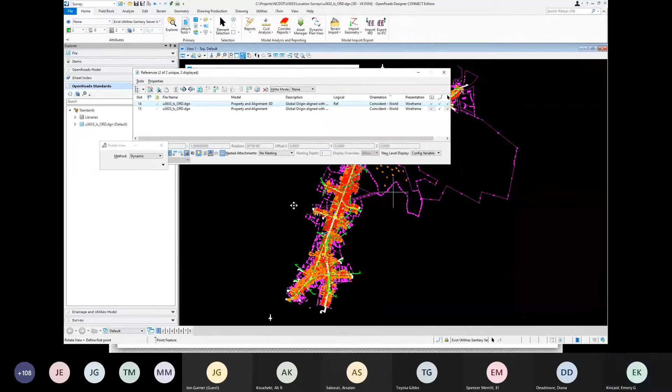Now, if you look here, what we've done is we've taken this file, and I'm going to just move my screen around here a little bit. You're going to see that this file is in 3D. It gets kind of ugly when I start moving it up here because everything here is at elevation, and everything here is at 0 because it's 2D.

So in effect, what we've really done is we've referenced the 2D to 3D. So I can come in here and I can simply toggle this off, and we see just the 3D aspects of the file.

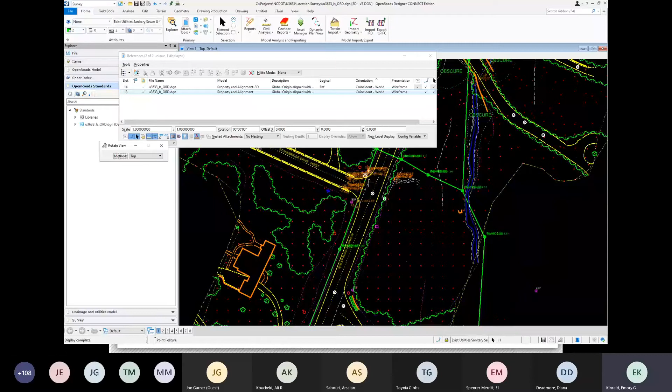If we zoom into some of these areas here, I want you to see some of the issues we're dealing with. We have the pipes, they're three-dimensional. And of course, I don't want you to think that means this is a model, because it's not. This is just 3D items in 3D space.

But especially in the areas of the catch basins, we are trying to do this automated, which gives you a little bit of faith that your labels are always going to get in, because it's easy to miss some labels when you're doing them by hand. But as you see, it gets real ugly here.

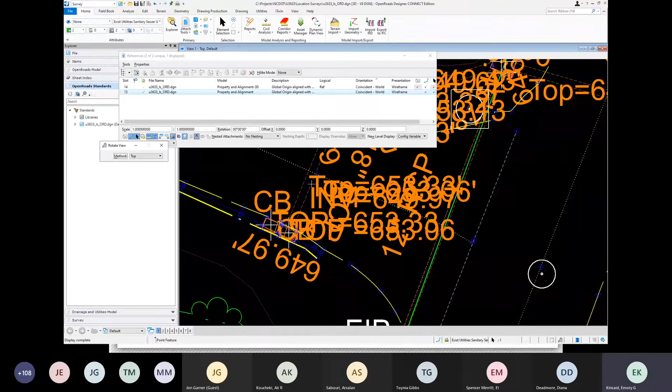Now, our hopes were that we were just going to move our text around and everything was going to be great for us. But we found that Bentley, through some of their automated mechanisms, is taking this text and putting it right back to where it began. And that's really causing us a little bit of grief. But that's the ugly we have right now.

Everything that you see that is being drawn here, I think these tools are going to work exceptionally well for you. We've tested them quite a bit. Some of our field offices have done quite a bit of testing on this. So I think you'll find that they work very well.

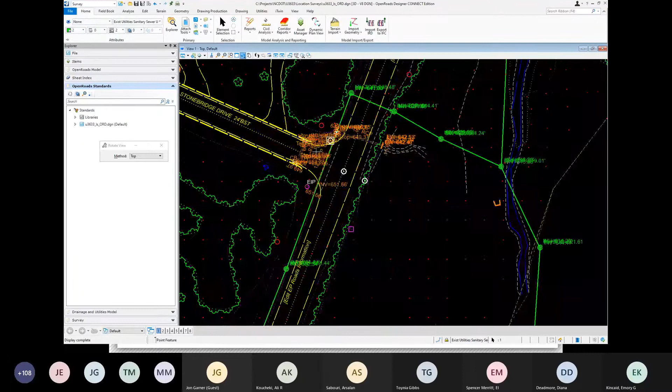So this looks like basically a merged FS file from the past, as well as a DTM file. Here you see the spots, you see the breaks. And of course, like I said, it's 3D. So if we turn this around, you're going to start seeing some of the aspects of it being in 3D.

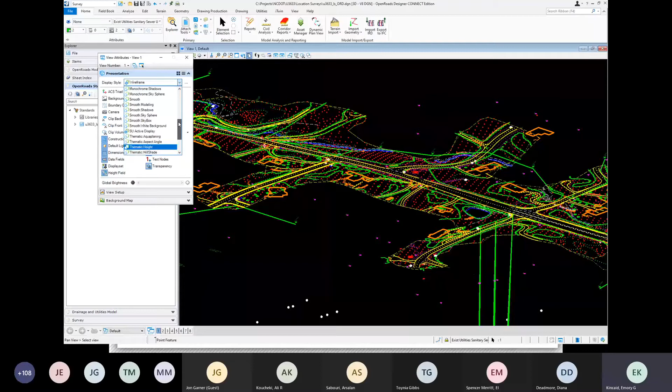What I'm going to do here is change the display style just a little bit. I'm going to change this from wireframe to the modeling, because that gives you a little bit better indication of what's going on.

Around the border of this, you're going to see a TIN hole, or a terrain model hole—trying to use the correct terminology. I can come in here and I can simply turn on our triangles, or whatever I want to, the contours. You start seeing what we're looking at.

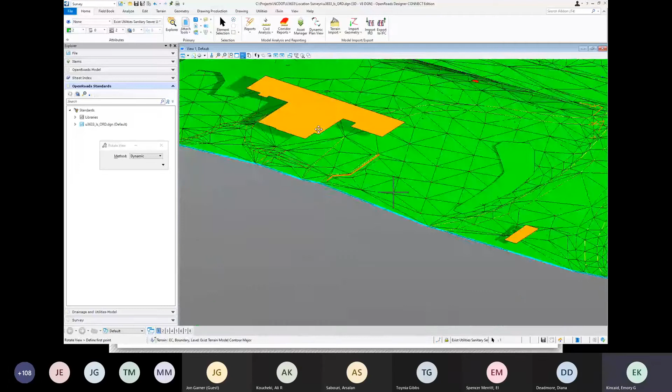If I go into the pipes or the piping areas, I need to change my translucency a little bit, but these pipes show up in 3D space correctly.

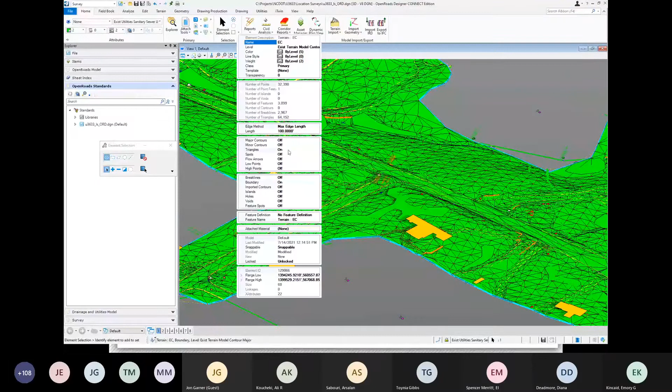And of course, as you see, they do show up as a circular object, as a pipe.

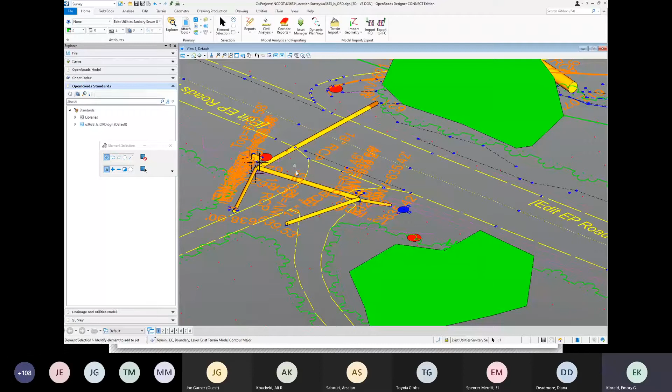One of the things we've been talking about is the labels and the issues we've been having with them. It is a bit frustrating. However, somewhere down the road, Hydro may come to us and say we really don't need those labels, because I can just as easily hover over those points and see what the elevation is without all that extra clutter. So we may find we don't need the labels, but for now, we felt everyone's used to it, so we need to produce those.

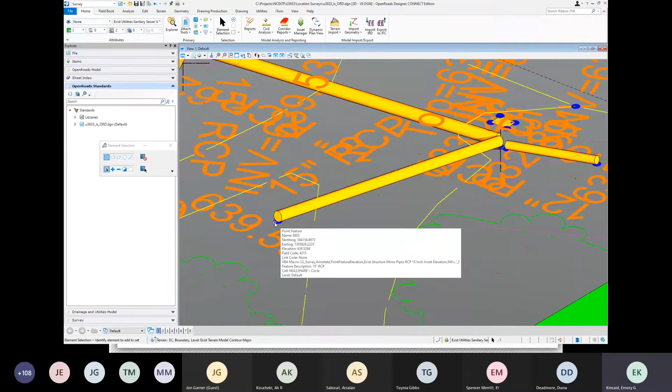With that being said, let's go back to our PowerPoint.

We hope to have training available in roughly the September, October timeframe of this year. We're lagging behind a little bit with what Roadway's doing, but we're going to have the same approach: a series of modules consisting of videos, training manuals, as well as data sets that can be utilized.

The whole idea is that you can have a video that will guide you through the process, and you'll have those same data sets so you can process it, starting and stopping the video as needed to assure everything's working out correctly for you. Our hope is that we'll start this out with a kickoff live training event through Microsoft Teams, available both to in-house personnel and our PEF partners.

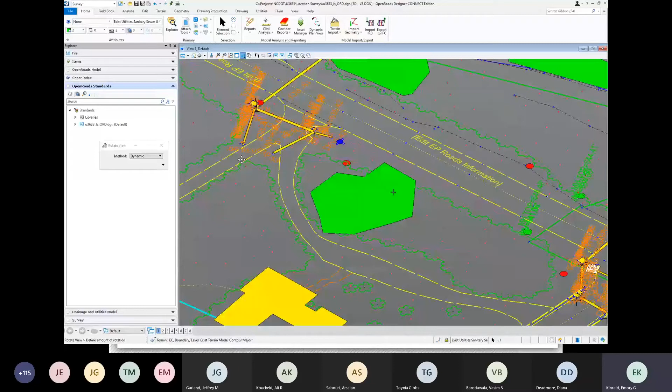Unfortunately, I say nothing's working, I shouldn't say that, but we've had quite a few things that have been challenges. As you see down below, there's a little bit of text we tried to take advantage of. This is a project that was done about 10 years ago, so we wanted to use this as a real test of what we could do if we were to do it now in ORD.

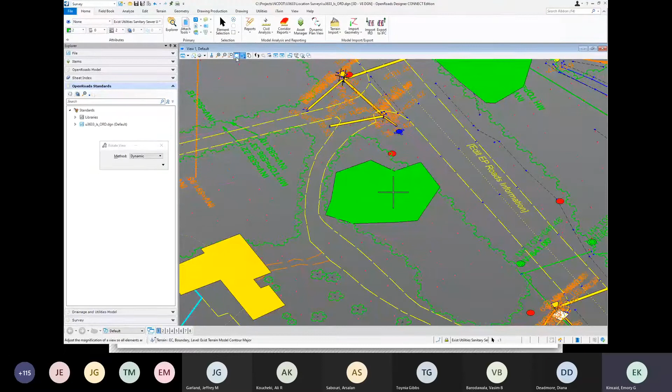So we tried to take advantage of some of the 2D labels that were done previously, and that's what you're seeing there when you see that stuff floating down at 0 elevation. In fact, that's what you see right here with these leaders. So this is definitely a work in progress.

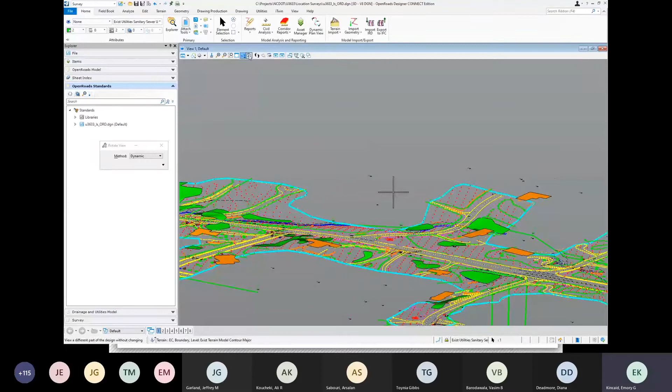One of the things you'll see is these buildings are floating because when photogrammetry picks out these buildings, they're using the eaves of the building, so these buildings are floating in 3D space. Now, you may see some of that. If we were to locate it ourselves, we would probably have this floating more closely to the ground, because that's where our shots would be taken. So there's going to be some unique challenges to get used to.

In regard to this, though, that is never really utilized for the design, so it's just more of a visual challenge than anything.

Emery, this is Jon. I have one question, if I could, please.

When you're talking about the labeling on the drainage there, most of the drainage lines are hard lines that are fixed and have inverts on each end. How would we be labeling, or expect to see labeling down the road, for a utility like a water line that could be flexible? Would it be labeled kind of like a PI on a vertical alignment, where however you determined it, test holes or known areas, those areas would have a label versus being able to get an idea that the entire depth is the same, if that makes sense?

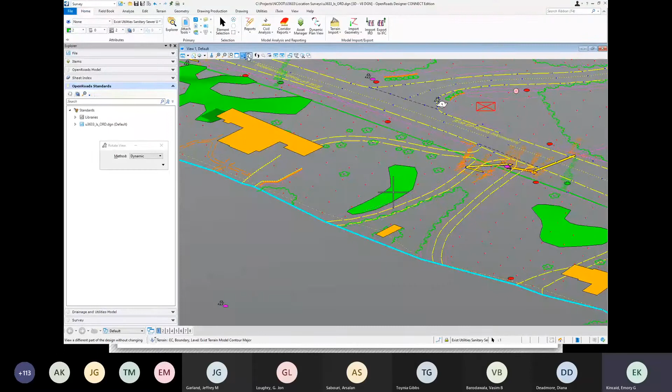That kind of makes sense, Jon, and I don't know that I can clearly answer that. I do know we've got some real challenges ahead when it comes to utilities. You mentioned earlier in your presentation, and I really liked how you said it, that we're trying to get more model-centric versus the crayon drawings. If you look at what you guys do on the design end, you're actually working in 2D view and everything just happens in the 3D, and you get some very realistic looking 3D models. As you see, I'm kind of dealing with crayon models over here in the survey world, because I can't put it in words that make sense to anyone, but survey just works differently than the design side. So the labeling you're speaking of, I'm not entirely sure.

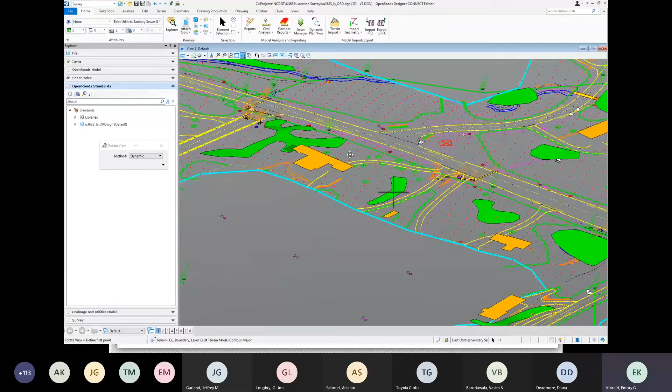I think what we're going to do, while this file may not have any great utilities, we're definitely going to have issues where when that utility snakes around, we're not going to necessarily be able to show that. And utility is just a challenge, right? Absolutely, always is.

Emery, Jon, are you finished with your question? I don't want to interrupt, ma'am.

Yep, thank you. Emery, there's another question, actually an excellent question, about condemnation, like PSTs. Do you know, is there a plan for those to be in 3D, or is that something we're going to still do in 2D since it's just a litigation map? Honestly, Toysia, those will probably be 2D. Just from the aspect, property's 2D, so I imagine the bulk of that is going to be in 2D.

That's part of the process that we really haven't spent enough time on. We have got some of the tools in place, but it's still got to be fleshed out.

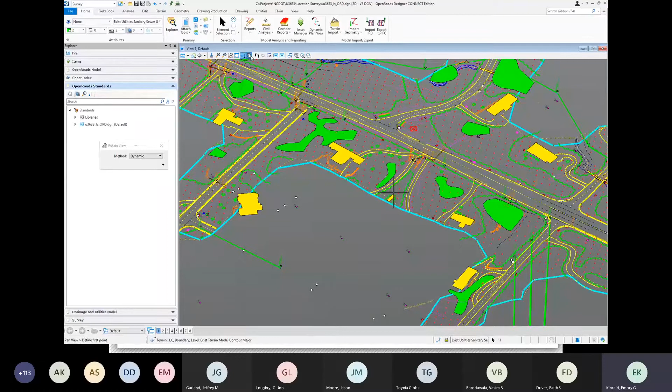As you see, we've got some issues, Jason, that I don't really see as issues - it's just something you're going to have to deal with. For example, when you see these leaders that are tremendously long going straight down, that's not a big deal when you're looking at this, since you'll most likely be looking at it from a top view. So I don't see that it will be a big issue for you.

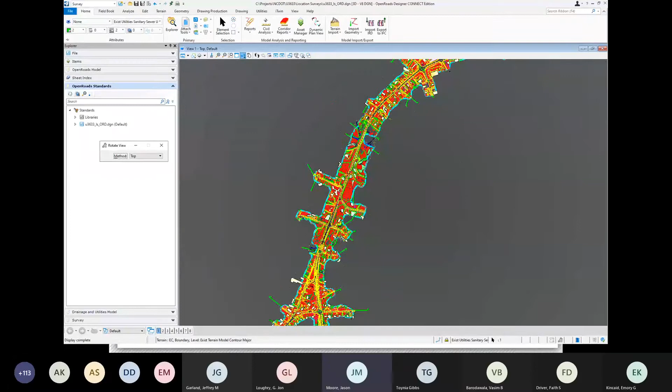Okay, and that's just a conversion issue anyway, isn't it? I mean, if you're creating one from scratch. It is - to be honest, we took some shortcuts. We had something already existing, and we said, well, text is kind of minor, so why don't we just copy it from the existing stuff? And that's how we ended up with that.

But right now we've got a few things we need to do. We need to fix some crossing break lines that have been generated in the terrain model, and there are a few other small items, but we should have it to you soon.

Emery, we had a quick question about whether the survey shots are brought in on the correct level. Could you open up your features and show them how the features are utilizing the same old field codes, and how that's what brings them in on the right levels? Oh, sure.

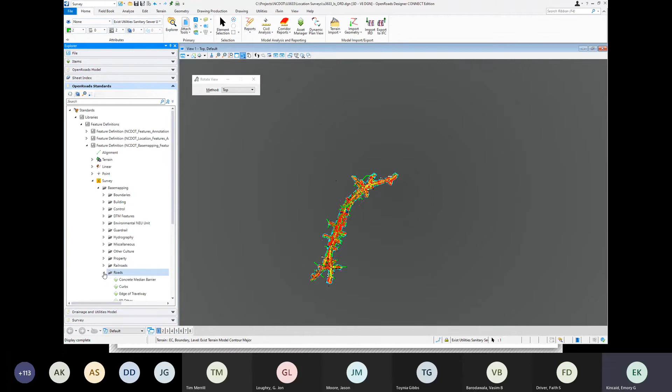Come in here to our standards. We've created - or I say we, I use 'we' pretty generally, Tim created this when he was here - a series of feature definitions. So for example, I'll go into roads, because that's all we deal with, right? If we go to edge of pavement roads, move my screen over here, you'll see that I've got the 3001 feature code there. So yes, to answer your question, everything will go to the correct level, the correct symbology.

Unfortunately, anyone who's used to doing mapping for us is accustomed to NC Map, and NC Map no longer exists. Probably the best tool in NC Map, in my opinion, was AutoText. So right now we're trying to give you something very similar to AutoText, but we'll never fully get all the functionality that AutoText gives us.

Is that what you want me to show, Tim? Yeah, I think that answered the question that was asked. Can you quickly go up there and show the two annotation tools that are based on features, to show what Bentley has put in? Oh, okay. You're talking about up here in drawing production? Yes, sir. Let me change my display out a little bit.

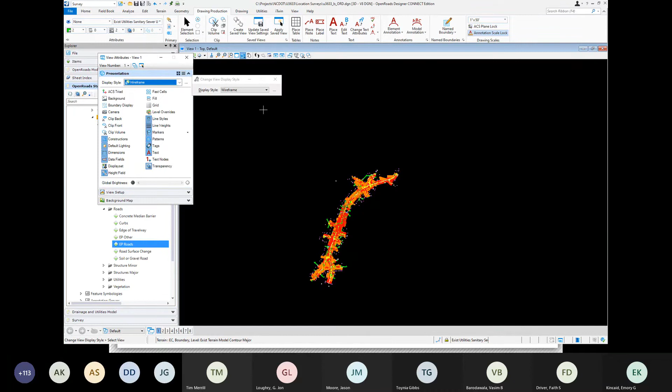One of the things that Bentley gives us, and what you're seeing here, I know it's a mess to look at, but they give us this ability to annotate an element. So we can set rules for what we want to annotate. In fact, you should find one of these pipes. When you see a pipe here that's got this 18-inch RCP with these inverts perpendicular to the end of the pipe, that's what Tim set up previously for us, and we really like that functionality.

Unfortunately, this version of MicroStation or ORD that we have, that tool got broken. So we discontinued this and started moving towards this instead. Now I'm hoping this will be fixed and we'll move back to this, because I really like that.

If this was working properly, all we would have to do is go annotate. It'll tell us what we want to annotate. For example, I can come in here and pick my particular thing, hit reset, and if we set up rules for that, it would annotate accordingly to whatever we tell it. So in the case of a pipe, all you'd have to do is click on the pipe, tell it to annotate, and it would drop all the inverts and your text in place.

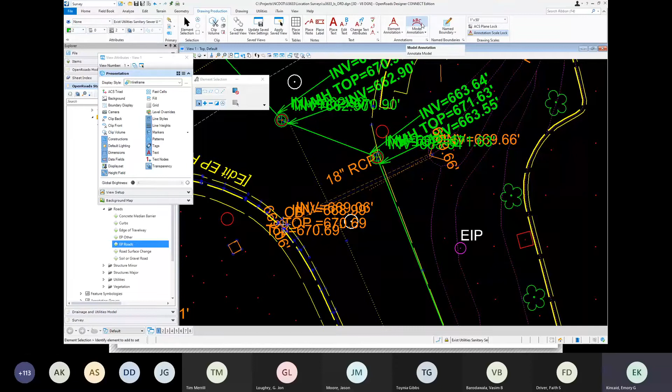There's also model annotation, which I don't think we'll use so much. That way, if you've got the rules set up, you just click that and everything that's got rules on it annotates. That works great in some instances, but in others, for instance, if we wanted to annotate road information, we don't want to annotate every element. So I don't think we'll be using that too often.

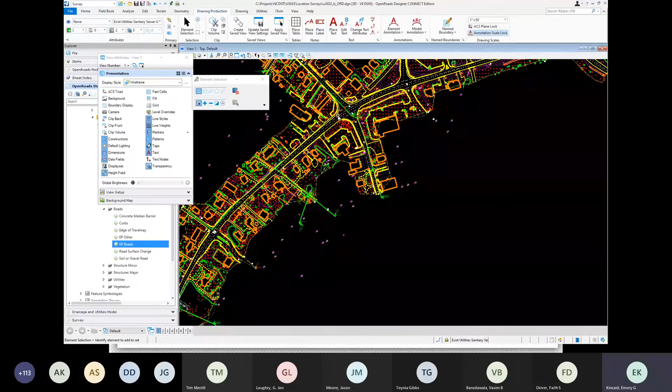One of the things we've been putting in place lately is the labels and notes. In fact, if you look at the lower section of this file, you'll see we've been working on that. So we're trying different things. In some ways, it's hard to tell which one's going to stick.

Emery, another question came through. Someone is assuming the alignments, the ELN, ALN, BLN, will be delivered inside the FS file in 2D. How will roadway and other units be able to use their design 3D features in a 2D feature?

Well, alignments are always 2D, right? It's just in the design world that they have a 3D opening up also when they do it. How will that get utilized? That is a question to be answered. There's a lot of things we're doing, thinking or hoping we're doing the right thing, but we may find we have to backtrack a little bit, and what we do today may not be what we do tomorrow, because we may find out we probably didn't make the right choice.

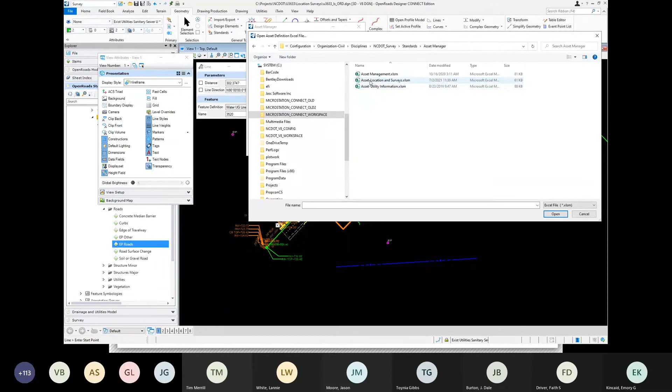We would use this tool called Asset Manager, and we would open up a file. In this case, bear with me just one moment... I went to the wrong place. So basically right here, we just type these in and say, hey, we want to add attributes to that, which we would then add. And after it's added, you should see that element if we do a properties check on it.

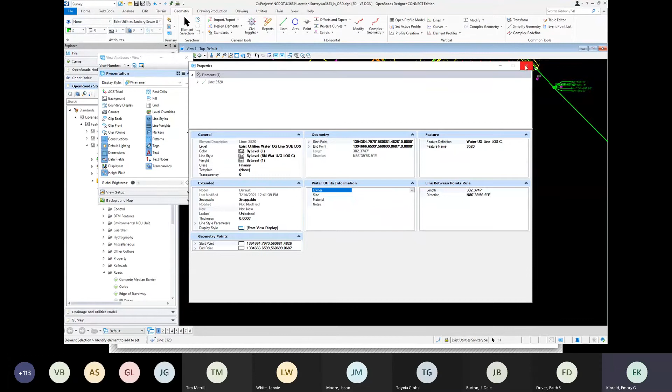We'll then have this, so it knew it was a water line. Now all you'll have to do is toggle who the owner is. So you'll be able to do the same type of items you were able to do with that NC utility application. It's a slightly different workflow, but the same information will be provided to utilities. Now, we haven't worked out the details about whether this is the best way for us to provide it to utilities, so that's some of the things we'll work out over time. It's like anything else, it's always a work in progress.

Emory, there's a question in the chat asking, are the 3D pipeline styles attached to your feature codes, your survey feature codes, and are you shooting the pipes with the beginning and the end or connecting them in the office? No, we're shooting them. They are connected, or linked, to the feature codes, and we're using a linking code for start and end out in the field.

And there's another question about the actual survey stakeout. Will we continue to download the information through the Trimble Link engine and continue to use an RXL format? Yes, although that's one of the things I hope Bentley will improve upon. Currently, if we want to take alignments out to the field with us, we have to use TBC as a conduit. We export the alignment information out as an XML file, read it into TBC, and from TBC we can kick it to the data collector. I would like a straight export from MicroStation to our data collector like we have now, but it's currently not working properly. Excellent, thank you.

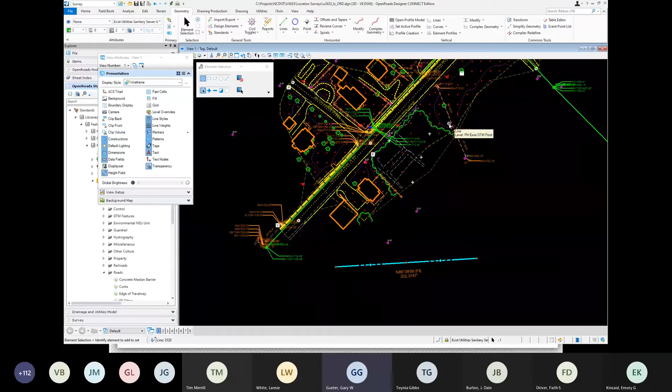Okay, like I said, I was just messing around with it, trying to find out what it can and can't do. I just didn't know, if you extend a line that's showing in 2D but also in 3D, and you extend it keeping the elevation, it seems to me it would have brought it in on that 3D, but it didn't.

You've hit on one thing that I think is important for everybody to realize. In the past, we always drew MicroStation lines - if we weren't using NC map, we were going up to our drawing tools and placing smart lines or lines, and that worked in SS4. Now that these have more intelligence through the feature definitions, I find that if I'm going to do any work, I avoid these tools right here. I always come over here into my tree and work here.

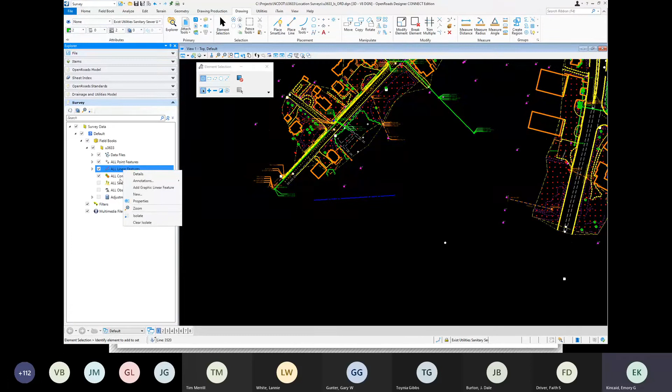You have the ability to create lines and everything over here, and I find that I avoid most of the pitfalls if I do work over in this. So that's something we'll try to address in the training.

There may be something from the design side that may help too. The only time when you start out with a 2D design file and the default 3D is created is when you introduce a terrain model or a profile to a horizontal alignment. MicroStation will create a default 3D of that, and then you can use the view control to right-click, show 2D and 3D, and everything. Like in roadway, we always work in 2D and let the 3D handle that stuff automatically for us. So you may have to start out in 2D and do one of those two things to get the default 3D created. Then whatever you do from now on is done in 2D, but it's automatically placed in the 3D default model. So that little caveat or situation is the main thing we want to focus on in ORD from the design file - the 2D and default 3D creation automatically is a concept we want to make sure our folks get, because it's not automatic. You have to do one of those two things.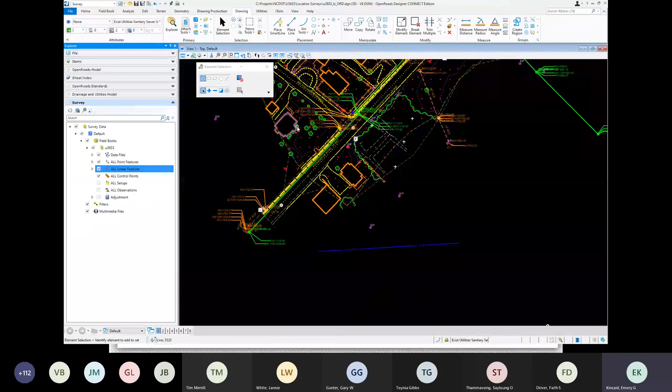Yeah, there's a real disconnect between the survey world and the design world. The guys in the design world get to work in that 2D environment and the 3D gets done automatically. You would think that same mindset would flow into the survey world, but it really doesn't. I could process all this into a 2D file, but at the end, I would just have a 2D file - nothing gets done on the 3D side. So it's a struggle to know what the right answer is here.

And Emory, correct me if I'm wrong - I guess when you guys start off from scratch, you use a 3D seed file, but other units use the 2D seed file, right? That's correct. We're working in 3D solely now.

So when you bring in something, should you work in 3D or can you work in 2D? Do the view control, like I said, where you could do a 3D and a 2D. Currently, we're working strictly in our 3D file. Okay.

I could interject just a little bit - you have to remember that the 2D elements you're bringing into your 2D file are passing through the creation of a feature, and that feature tells it to include it into your terrain model. If you're using a feature that does not have that switch on, it's not going to alter your 3D terrain model. It'll appear in 3D, it just won't be included in the creation of the TIN file, or the terrain file, or the terrain element. So that could be a point of confusion, I think.

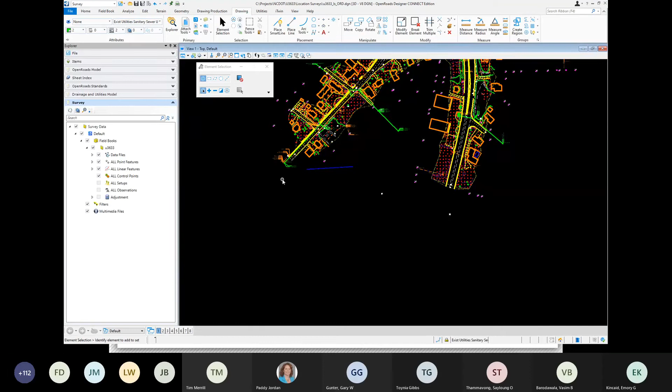Yeah, I'm not sure if this was covered, but annotation scale for the survey drawings, when our roadway drawing sheets are at different scales, is it going to automatically scale? Yes, ma'am, that is correct. For example, you'll see all our stuff here. If I drop that down, say I want to use 1 in 20... why did that not work, my machine's locked up, I'm getting a spiral of death here. But yes, Paddy, you are correct, and it does affect our annotation scale.

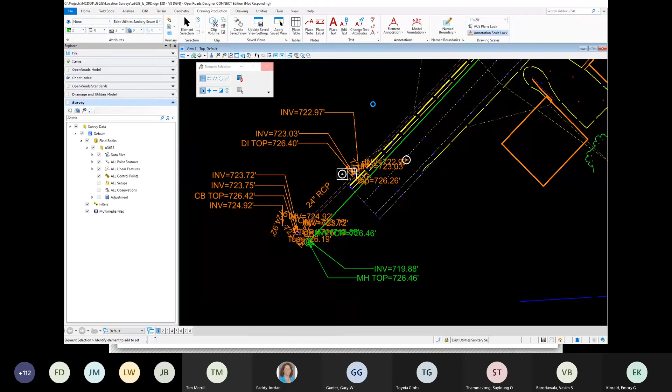And when we were talking about 2D and 3D files, I was just thinking about coordinate origins of the seed files and stuff like that. I assume that's already been identified in state plane coordinates. Yes, it is. Nothing really new on that front that has to be worried about.

It took a while, but there you got it.

Emory, I'm not sure if you heard Paddy's question. I guess not, I'm sorry. It was just, Paddy, did you want to ask it again? Yeah, I guess I'm not sure if I'm asking the right one. So there used to be different state planes for different states. I assume the seed files for North Carolina have already been updated for ORD. Yes, they have.

And of course, this is going to be down the road, we'll be getting new seed files at some point due to the datums changing. Probably in the year 2025 it'll be the 2022 adjustment, so everything will change accordingly, as well as go away from the U.S. survey foot to the international foot, which opens up a completely different can of worms.

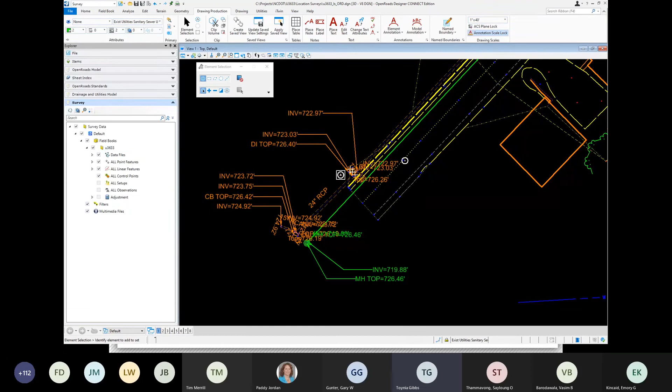Emory, do you have anything else? No, I think I'm good. I'll be happy to answer any questions you have, feel free to send them to me. It may be a little while for me to get to them, like I said, we're definitely down in manpower around here, but I'll definitely get around to it.